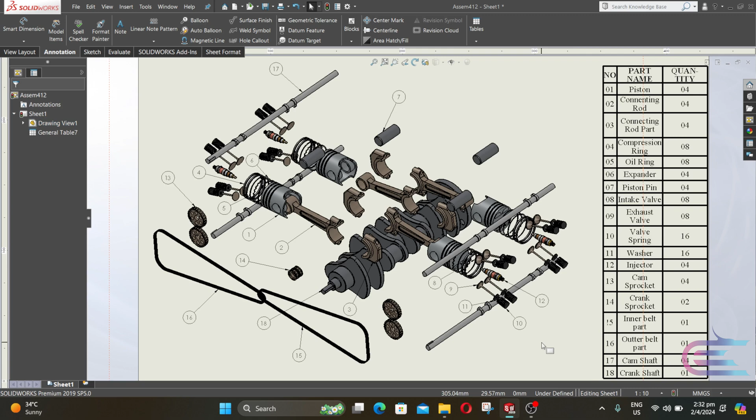Assalamu alaikum. Welcome to Explore. In this tutorial, we are going to assemble cylinder head parts of a Boxer 4 engine. So let's start.

Right click over top plane and select normal to. Right click again and select sketch. Select center line. From this end, draw a vertical line. Press escape. Press enter again, and draw a vertical line similarly here.

Now select smart dimension. This distance is 253.817806 millimeter. Similar distance in here also.

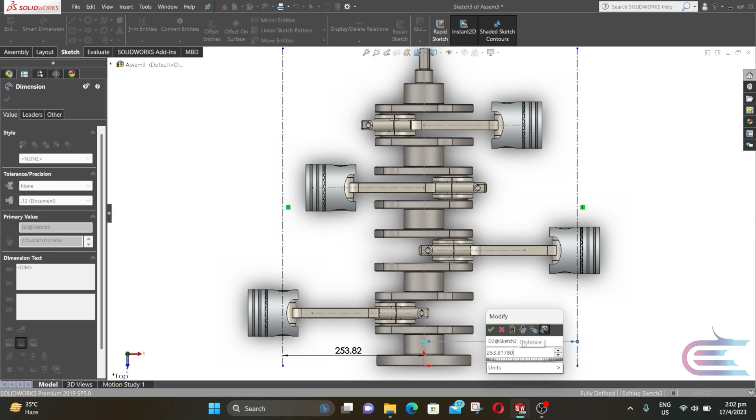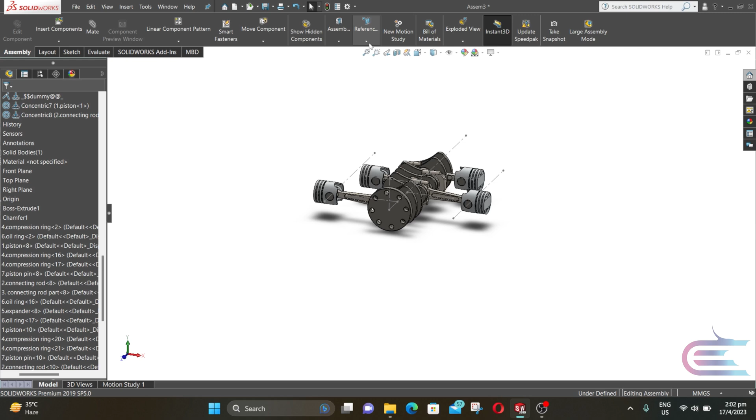Now exit the sketch. Now go to assembly. From reference, select plane. Expand assembly and select the top plane. Now second reference will be this line.

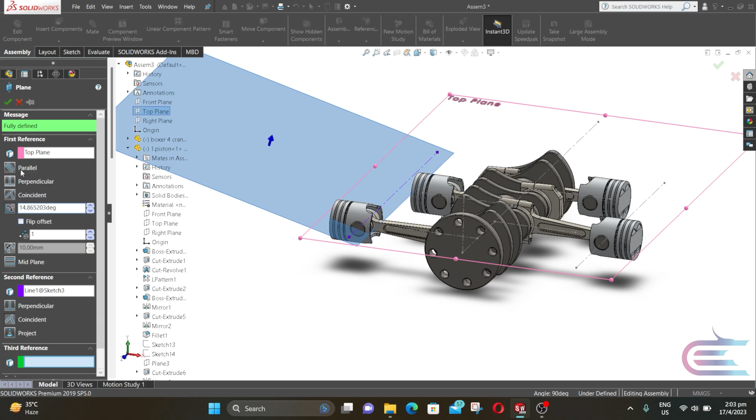Click on angle and input 14.865203. Now click OK. Click on the background to deselect. Now repeat the same process. This time click on flip offset, then click OK.

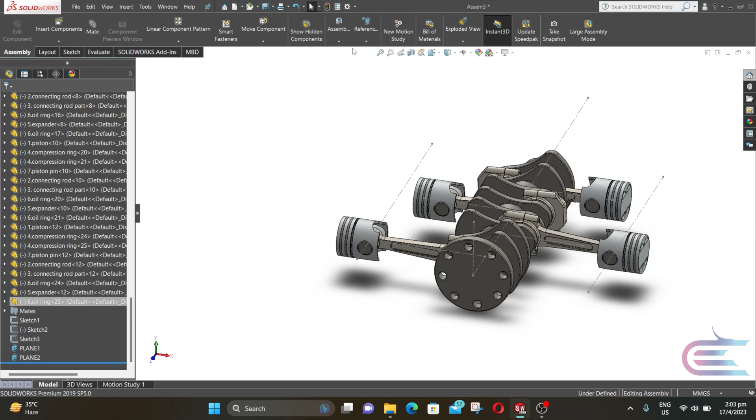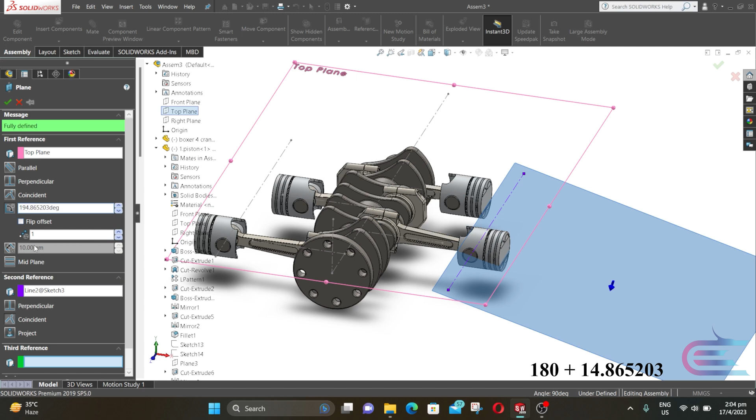Now create two more planes for the right side using the similar method. Add 180 degree for opposite direction. This time click on flip offset, then click OK.

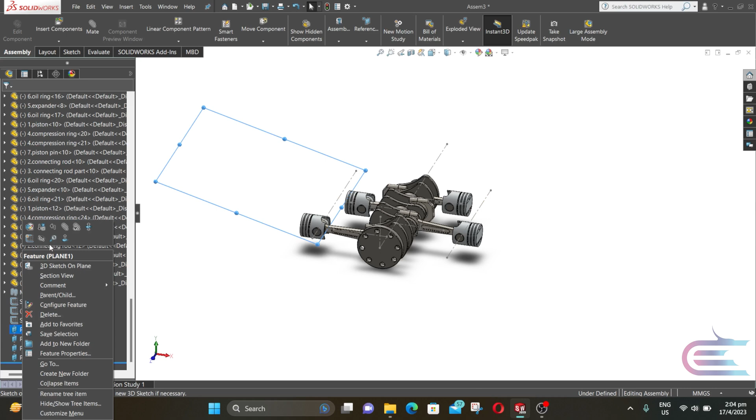Now right click over plane 1 and select normal to. Right click again and select sketch. Now select center line and from this edge draw a center line.

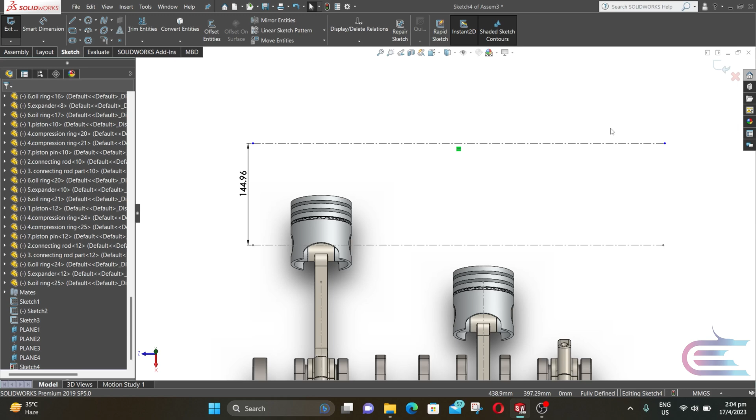Now this distance is 144.963389 millimeter. Then click OK. Now exit the sketch. Now similarly create center line on other three planes.

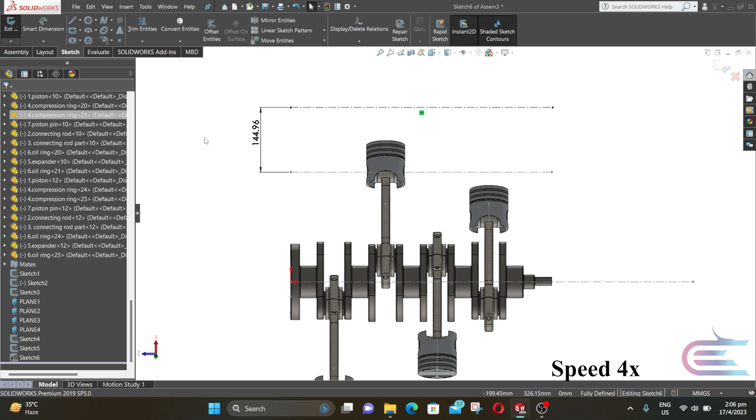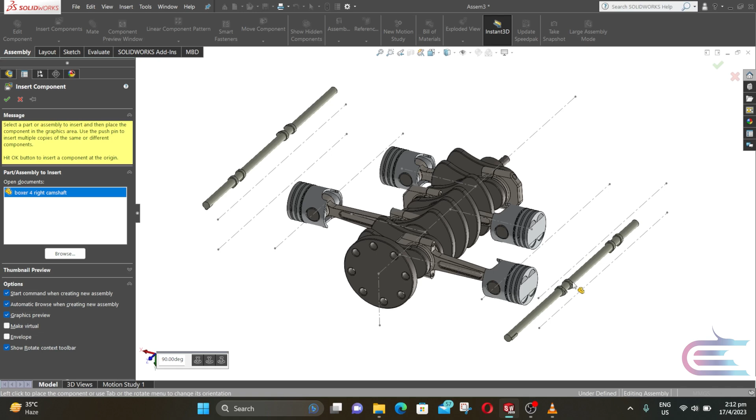Now click on insert component. Press Ctrl and select left cam and right cam and click on open. At first the left cam is selected, so put the left cam on the left side, then put the right cam on the right side. The keyway of the camshaft and crankshaft should be in the same direction.

So right click over the left cam and select move with triad. Then rotate 180 degree. Then click it. Similar to this side.

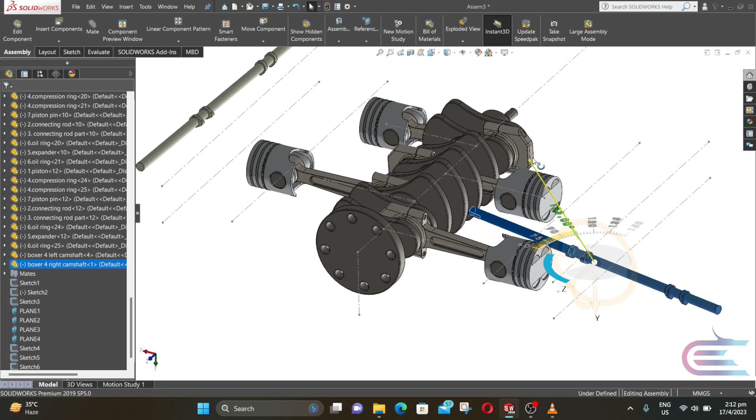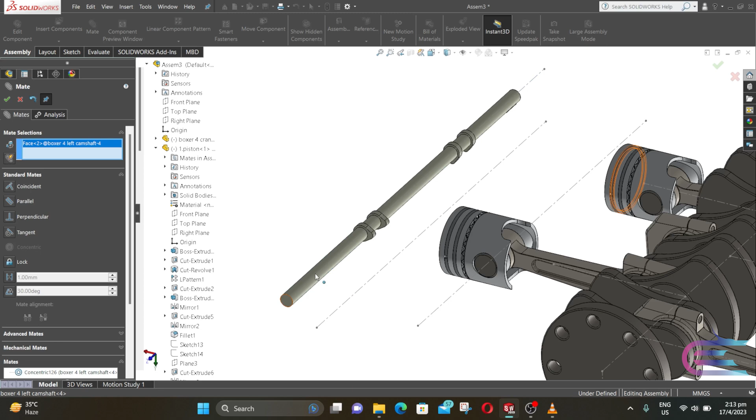Now press Ctrl and select the surface and this line, then click on Mate, select concentric and click OK. Select this end surface and this end point of the line, then select coincident and click OK.

Now close the mate, expand insert component and select copy with mates. Now select the camshaft, then click on next, select the line and select the end point of the line, then click OK.

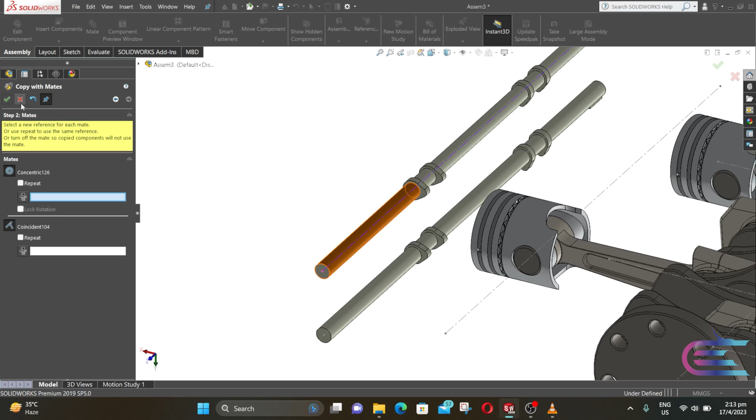Now close the mate. Do similar process on this side also.

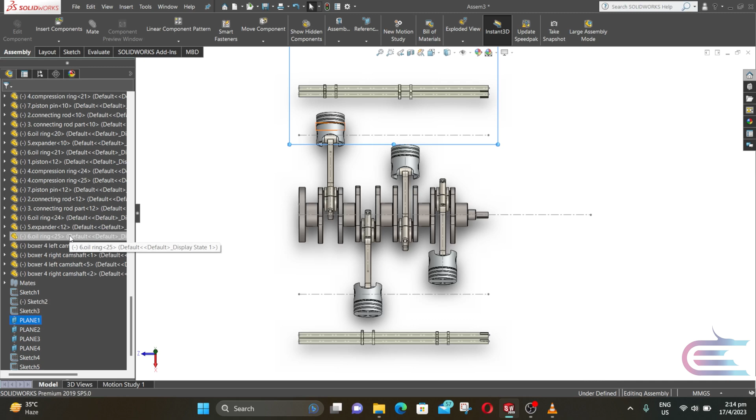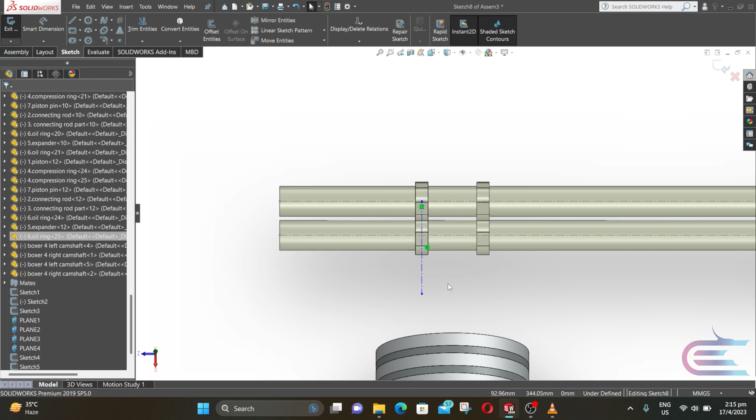Now right click over plane 1 and select normal to. Right click again and select sketch. Select center line. Put the cursor over the cam profile and the midpoint will be shown. From this line, draw a vertical line. Repeat the same process for all other cam profiles.

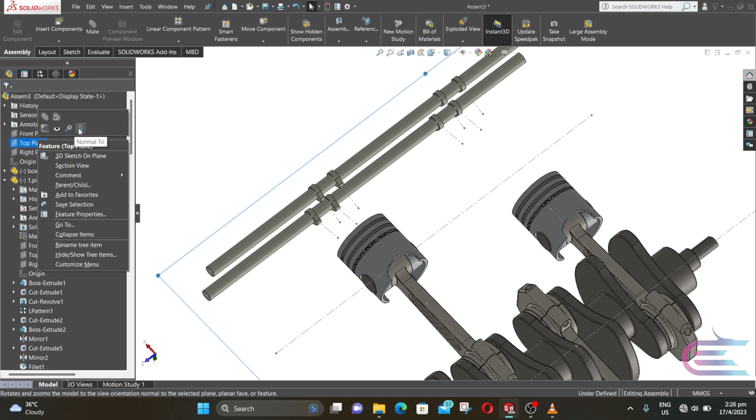Now right click over top plane and select normal to. Right click again and select sketch. Select center line. Following this end, draw a vertical line. And similar to this end.

Select smart dimension. And this distance is 413.79 millimeter. And similar to this side also.

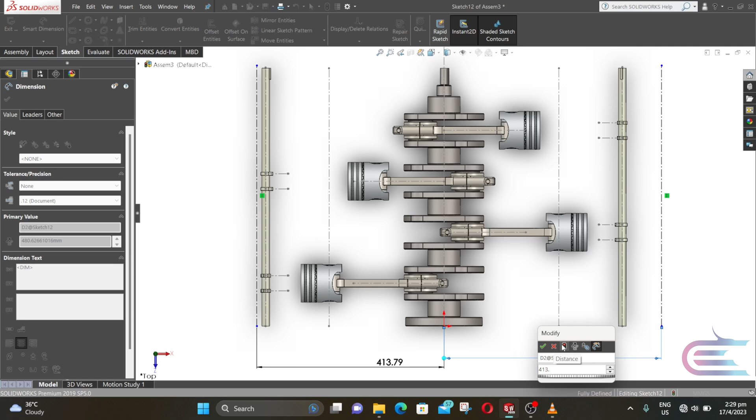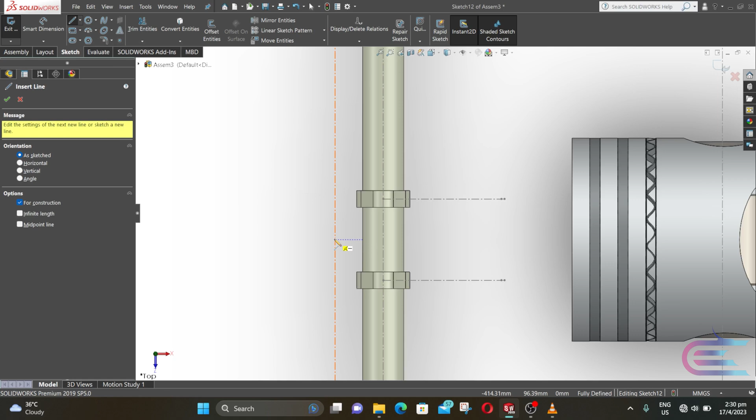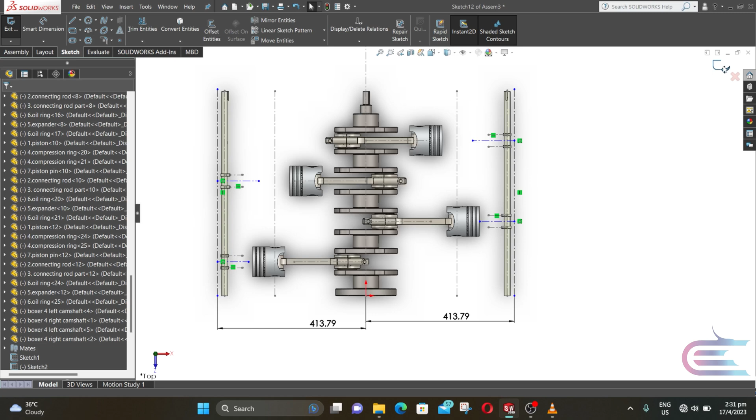Select center line. Now put the cursor over this edge between two cam profiles. Then the midpoint will be shown. Following the midpoint, draw a horizontal line using the previous vertical line. Now repeat the same process. Now exit the sketch.

Now click on insert component and select intake valve, valve spring and washer. Then click on open. Now click on the components to put it here.

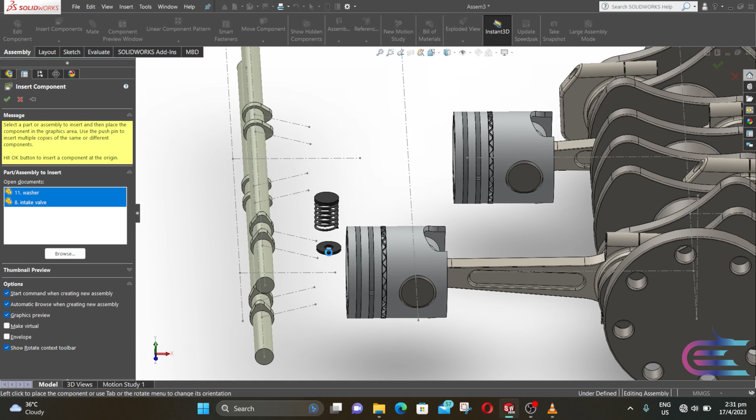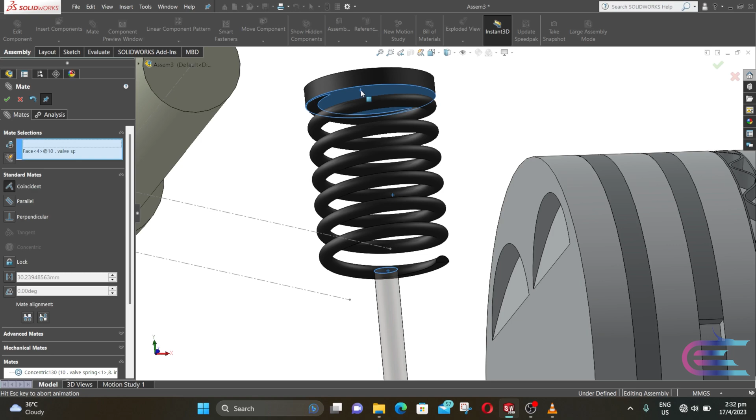Now press Ctrl and select this surface and this surface. Click on mate. Select concentric and click OK. Now select the upper surface of the valve and the lower surface of the valve spring. Then select coincident and click OK.

Now select this surface and this surface. Select concentric and click OK. Select this surface and this surface. Select coincident and click OK.

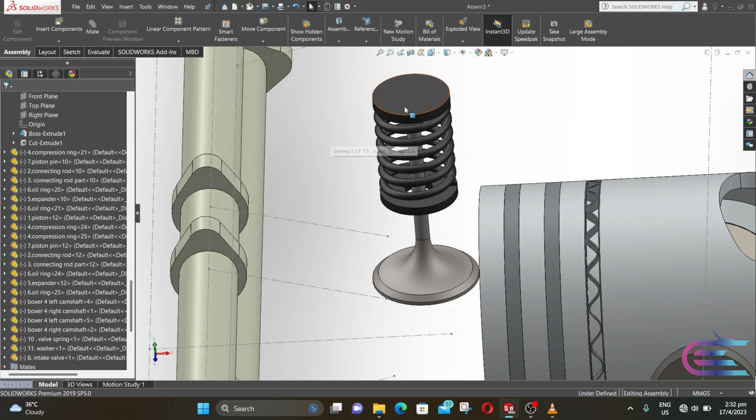Now select this surface. Press Ctrl and select this line. Click on Mate. Select concentric and click OK.

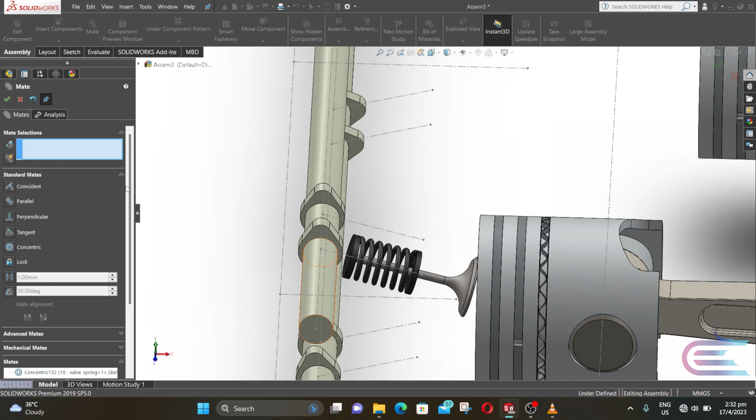Now put it close to the cam profile, then close the mate. Expand insert component and select copy with mates. Now select all the components of this assembly, then click on next. Select the adjacent line, then click OK. Now repeat the same process.

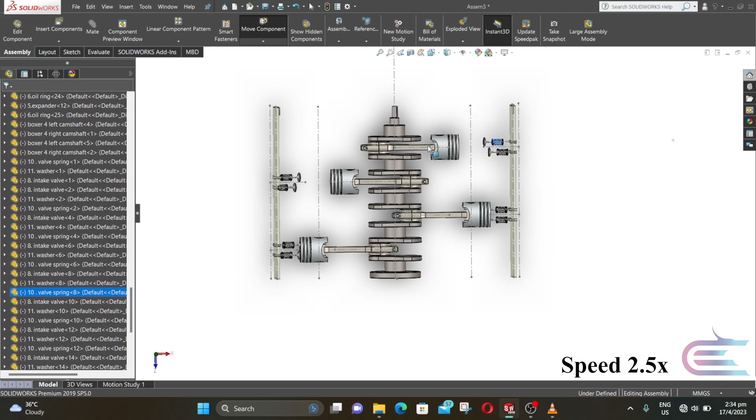Now click on mate. Delete the pre-selected one. Expand mechanical mate. Click on cam. Now select the cam profile surface and the valve spring surface. Press enter. Now repeat the same process for all other assembly.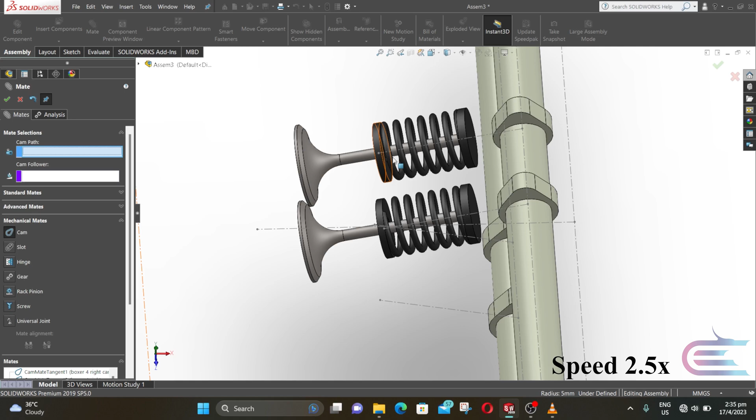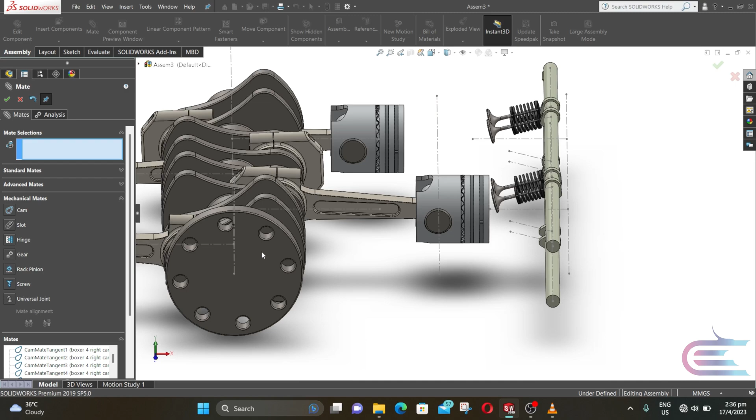Now rotate the camshaft to check the assembly. Now close the mate. Click on insert component and press Ctrl and select exhaust valve, valve spring and washer. Now assemble these components similarly as to the intake valve components.

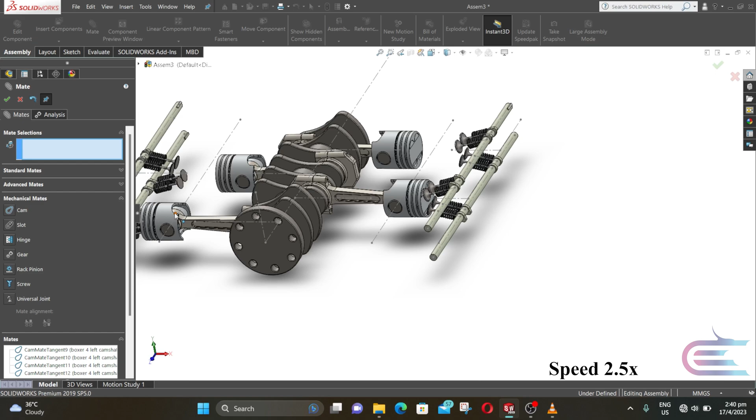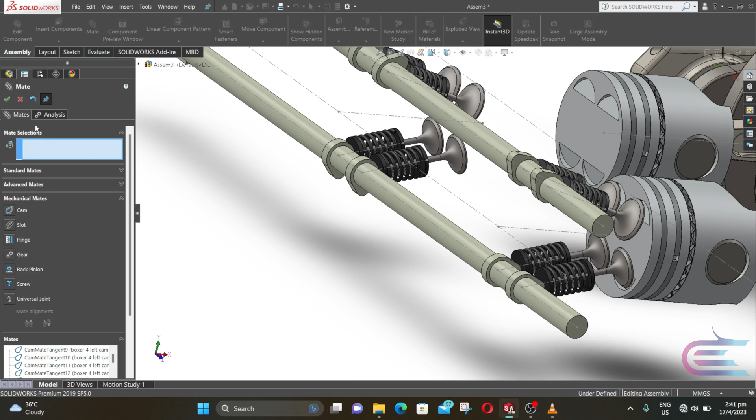Now close the mate. Click on Insert Component and select Fuel Injector. Right click over it and select Move with Triad. Then rotate this part at a suitable angle.

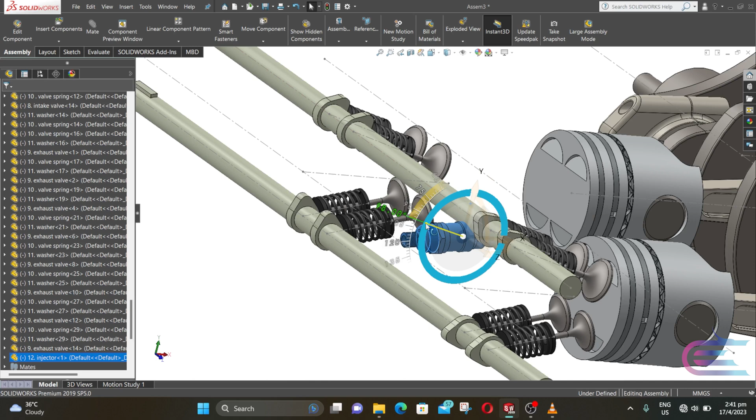Now press Ctrl and select this surface and the line. Then click on Mate. Select Concentric and click OK. Now select this surface and the first point of the line. Select Coincident and click OK.

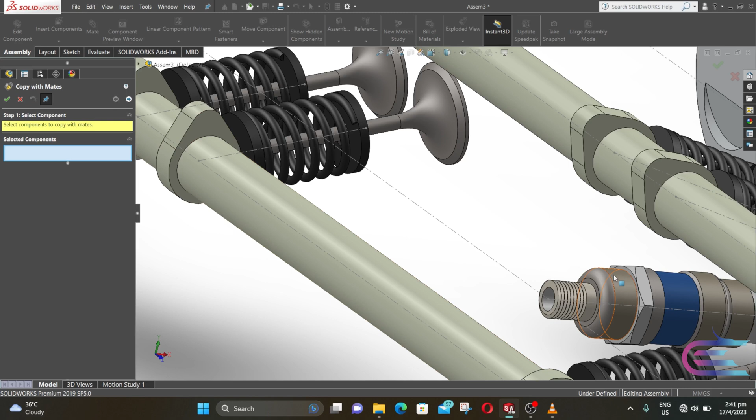Now close the mate. Expand Insert Component and select Copy with Mates. Now select the injector, then click on Next. Now select the adjacent line and click on the first point of the line. Then click OK. Now repeat the same process for other two lines.

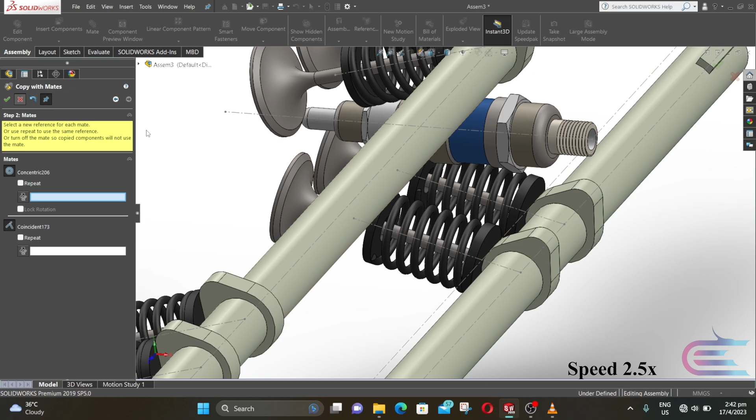Now go to File and save it.